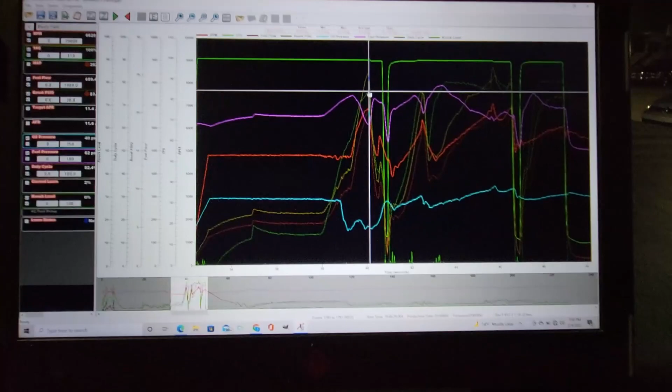So I think I'm just going to stop trying no lift shift and actually let my foot off the gas pedal. But if you look here, you can see I'm on the two-step at the line, and I was trying to let boost build, and I was about 4 pounds, and then as soon as I let off, the boost skyrocketed for first gear, which is awesome. So we actually saw 23 pounds of boost in first gear. The most I've ever seen in first gear before was 12.

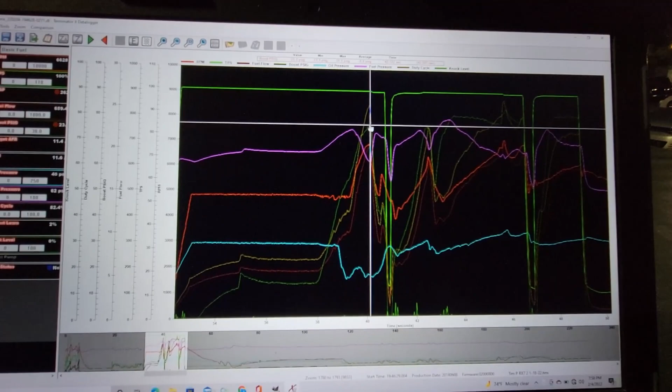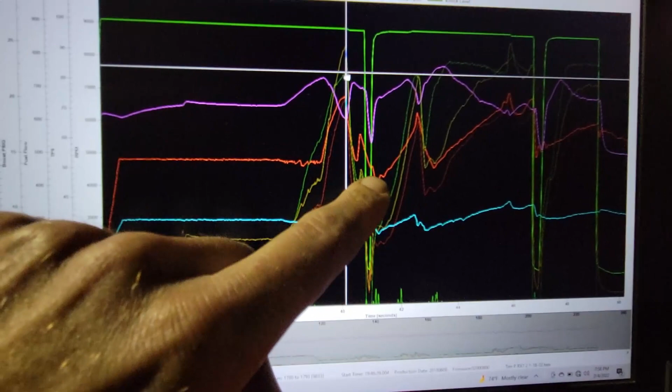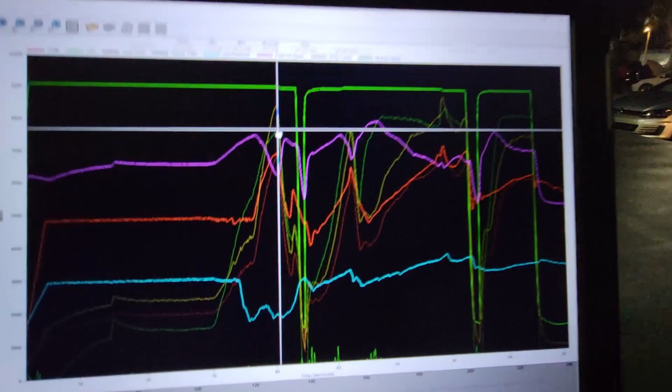So suddenly the boost controller is working. I don't know what the hell's going on, but you can see I hit it, went to no lift shift, and it just wouldn't go in gear, so I let out of it. The green is my throttle right here, so let out of it, got it into second, hit it again, no lift shift into third, worked fine, and then when I no lift shifted into fourth, it just slipped, and then I let out of it and it came back in again. So I think either I'm gonna have to lower my rev limiter or shift earlier, or just stop using no lift shift. But that felt pretty damn spicy.

We made 25 pounds, so that's like 800 horsepower. That's a 9-second car, we just gotta hook it. So we're gonna try it again.

All right, well, we had a dude in a Mustang do a big wheelie and run transmission fluid all the way down the track, so we've been waiting 2 hours to make this hit. A little tired now. We're gonna give it the beans anyway. Let's see what happens.

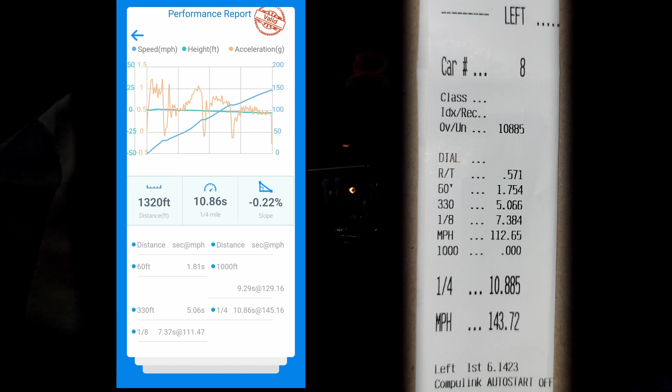Draggy says we did 10.86. So another 10-second quarter mile. That damn 60 foot's killing me every time.

Well, that was a fun time. We laughed, we cried, we waited in line because some idiot in a Mustang did a monster wheelie and broke his transmission open and slicked the entire track from start to finish instead of pulling over and only slicking one part of the track. But we learned things. We learned that monster clutches rated at 700 foot-pounds of torque can't handle all the stinky beans that Tater's gonna throw down. So me and Burrito are gonna take a moment of silence as we wait for our Tilton twin disc 1250 foot-pound clutch to show up tomorrow.